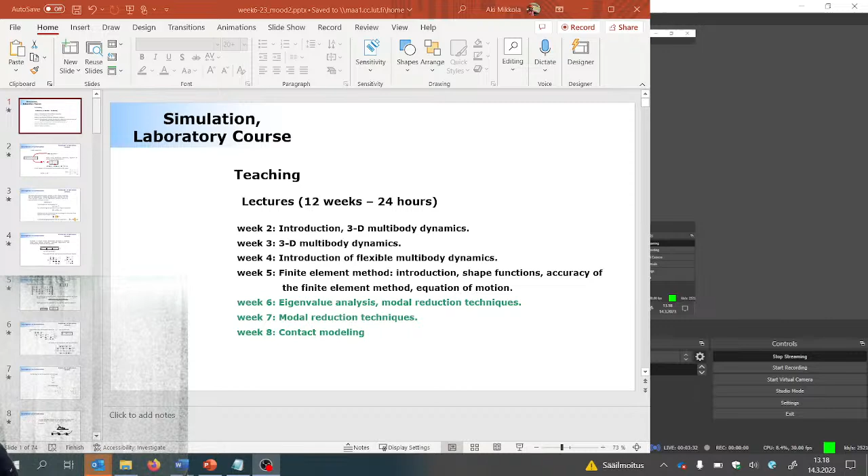Display, so it's a display capture. That's what I would like to use, not this one, but display capture. Okay, so it's active and on.

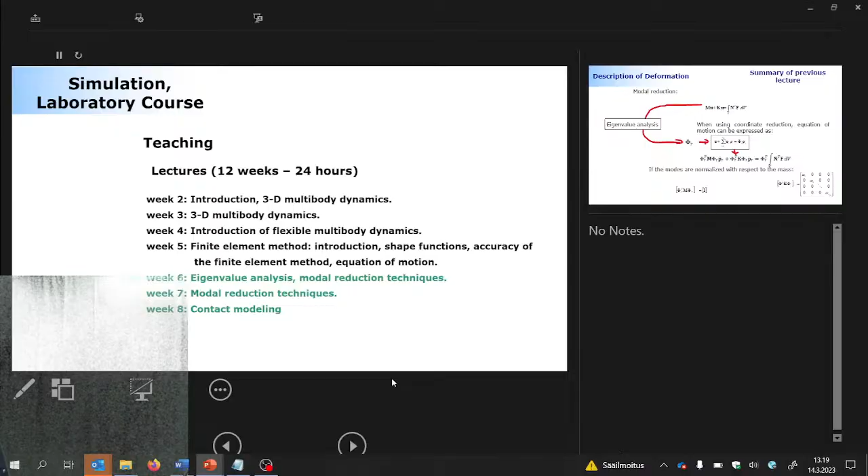Good, but not displayed well to online participants. Okay, so looks good, looks good to me. Yeah, looks good to me.

All right, so what's going to happen today? So we're going to spend these 45 minutes to try to close the case about modal reduction.

And how is my voice, by the way? Is the voice on? It's like 5 seconds of delay, and this is not displaying well, so I need to show this HDMI one.

When do you think it's going to be finished? We're going to close at 2 o'clock. Two, okay.

What about this guy? Why is this not willing to work now? So what should I do here? This is it, this is this, duplicate. Okay, now it's finally good to go.

Cool, and what about this side? Is it okay? Yeah, it looks good to me. Okay, cool. Yeah, it looks okay to me.

That's not the perfect green screen, but it will do the job because we cannot do more tuning here, so it's okay. So maybe, let me see where should I stand. Here.

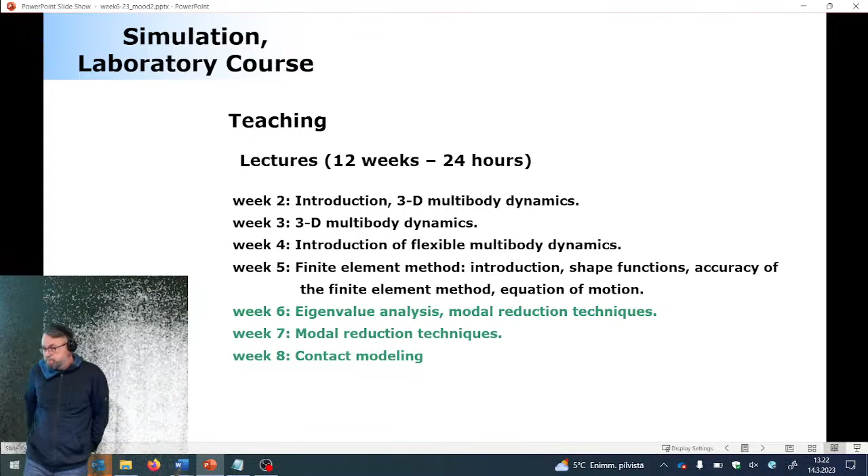This is a very lengthy summary of what we discussed, and I'm going to be very brief here.

So it's all about starting from a full finite element model. And then what we wanted to do with the full finite element model is run the eigenvalue analysis. Based on the eigenvalue analysis, we can get the eigenvalues and corresponding eigenvectors. In theory, if you have a model with 100,000 degrees of freedom, you can get 100,000 eigenvalues, these natural frequencies, and 100,000 corresponding eigenvectors.

That's 100,000 ways that the body can deform, and it's pretty clear that not all 100,000 are significant. Some of them are more significant than others. What happens if we ignore the insignificant ones? Then we can reduce the size of the problem, and that's exactly what we do in a modal reduction technique.

So we conduct the eigenvalue analysis and get an eigenvector, which is a way the structure can deform. How much this particular way will contribute is unknown. That's called the modal coordinate. In our case, the modal coordinate is the one denoted as P here.

Okay, the pen is not willing to work. No, all right, never mind. You see the P here, so that's what it is.

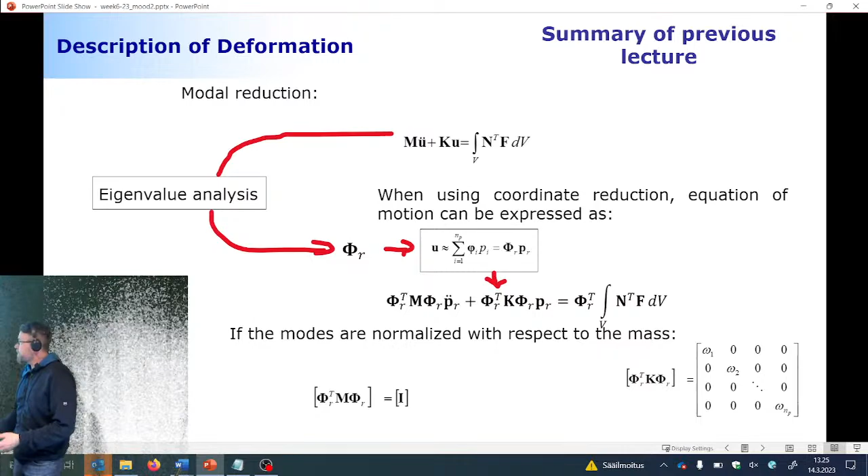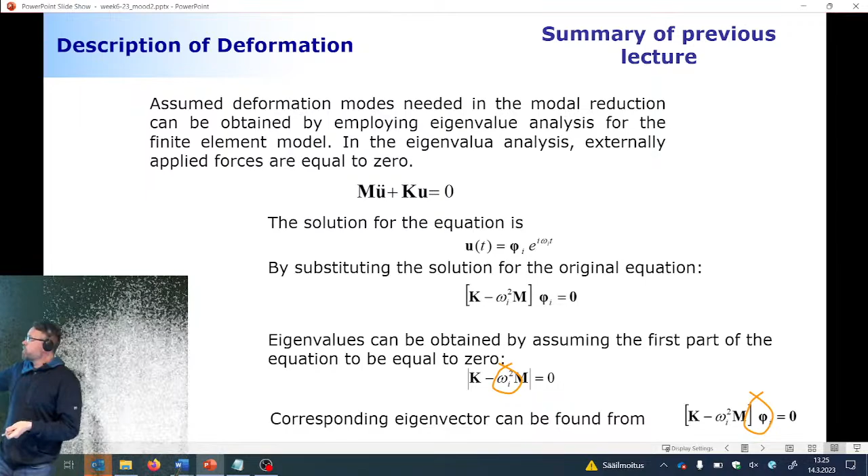So that's what the method is about, and we learned how you do this. In the eigenvalue analysis, it's very important to understand that there's nothing to do with the actual absolute responses, because when we're computing the eigenvalue, we're setting the force equal to 0. When we do that, we can get these eigenvalues and eigenvectors.

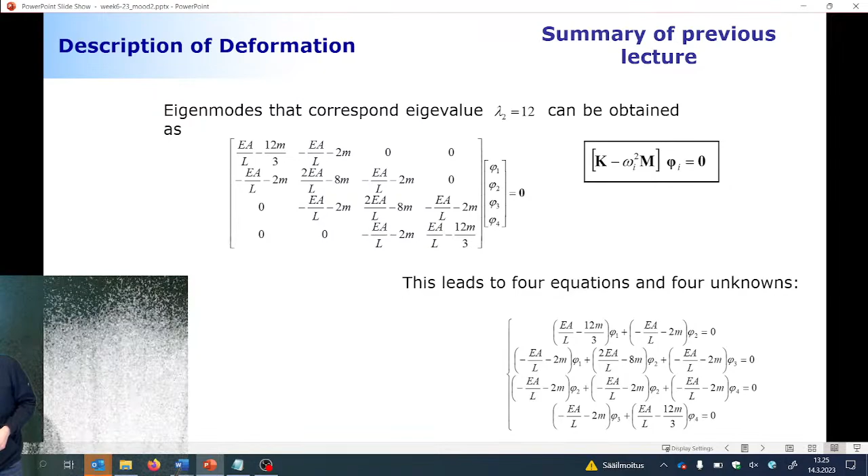An example we looked at was this beam structure, spring structure, and we were able to extract a total of 4 different eigenvalues and corresponding eigenvectors. So that's what we did a little while ago.

Big question is this. What we did in the case of the spring structure was set no boundary condition. The boundary condition in finite element method means the way you constrain your model to ground, the fixed coordinate system. That's typically what that means. Now, the boundary condition we used in the example I just browsed over was no boundary condition. But in real life, what would be the right way to set the boundary condition?

The figure of the real problem you can see in daily life is a crankshaft mechanism. In the crankshaft mechanism, I'm looking at this connection rod. The connection rod is connected by a revolute joint on one end, and another revolute joint on the other end. What is the right way to define this boundary condition?

Here's something very important: the boundary condition that you set in your finite element software will later be called the reference condition in multi-body system dynamics. Why? Because remember the big picture here: we're describing the deformation with respect to a reference coordinate system. What's the reference coordinate system? That's the one that is rotating and translating with the body.

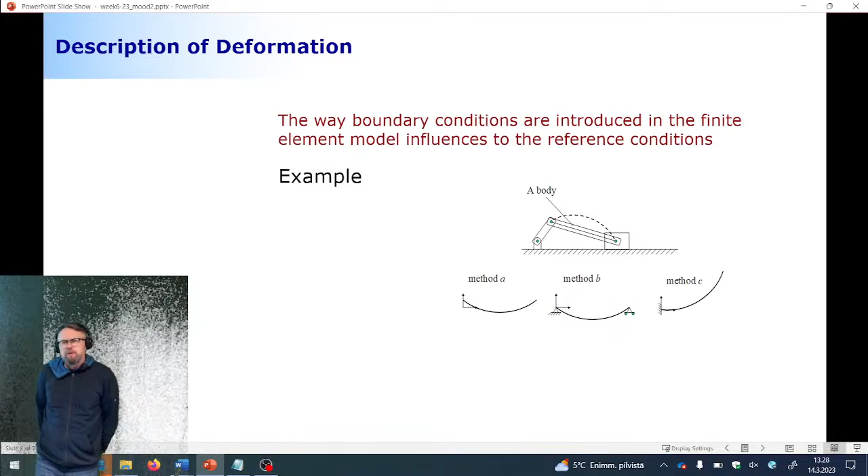But what do you guys think? What would be the right way to do this? What do you guys think is the right way to do this?

Now this is not so serious, we can just communicate it, but I still would like you to use Socrative, because I said that it's easygoing and not serious, but it is, because I'm grading your performance based on this. So what I'm saying and what I'm doing is not the same thing.

So what would be the right way to set the boundary condition, reference condition? The options are method A, where there is no boundary condition whatsoever. Then there is method B, where a simply supported boundary condition is used. Or method C... oh, Socrative is not on. Okay, hold on, just a second.

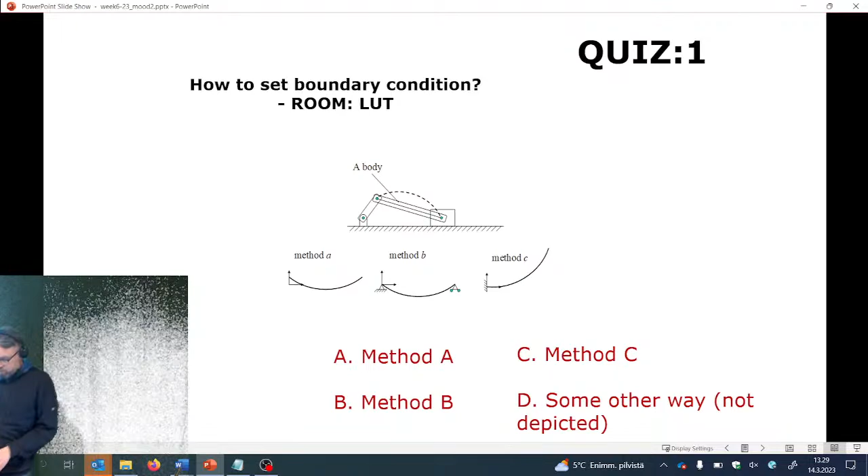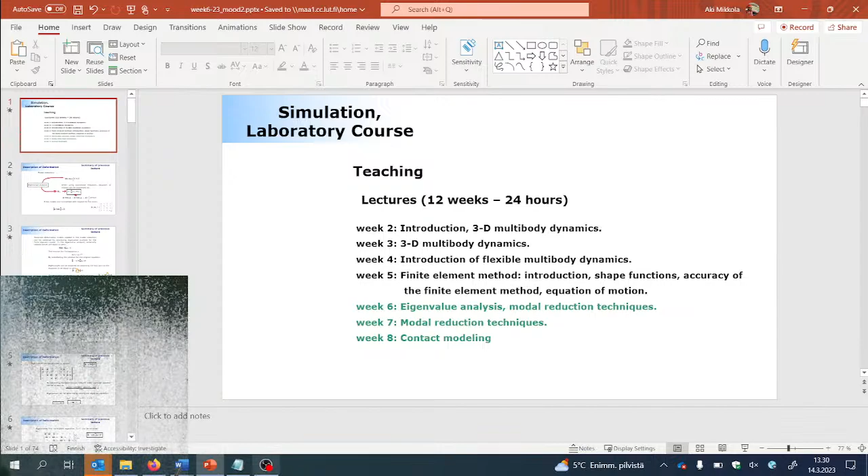How to set the boundary condition? Let me take myself back to this slide where things are explained. Here it is. These are the options: A, B, C, and D. Team Malaysia, how are you casting your vote? How are you entering your answer? What is that, from A, B, C, and D?

B? You both are agreeing with that? All right, then let's take a look at what the others are saying.

One more thing I need to find in my backpack is this one here. Okay, my pen. Yep, I can write because I need to do some writing momentarily. Are we okay? So can I close the in-class quiz? We have 4 students only. I guess that's it today.

Everything is correct. You can do it any way you want. The answer for this question is you can do it however you want.

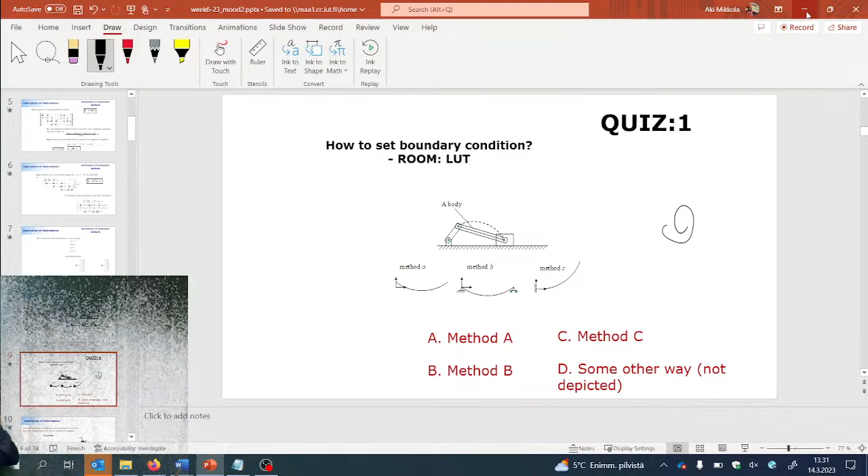This is very, very confusing. Because you know that the boundary condition, how you set this reference coordinate system, will affect the natural frequency. The lowest natural frequency will be different in this case compared to this case, compared to this case. Come on, what is this? So how come you can get the same response?

Here comes something extremely important to understand. What we do in multi-body system dynamics is travel to a final location, which is the position of a particle. Let me highlight this using this drawing. Let's say we have a cantilever beam like this, in its undeformed configuration, and it is loaded by a force at the free end. So what happens is it experiences deformation roughly like this. Sorry my writing isn't very clear, but that's what happens. Now, we are interested in where the end, actually all the particles, are located with respect to the global coordinate system, which is this coordinate system here. Let's see how we can do this.

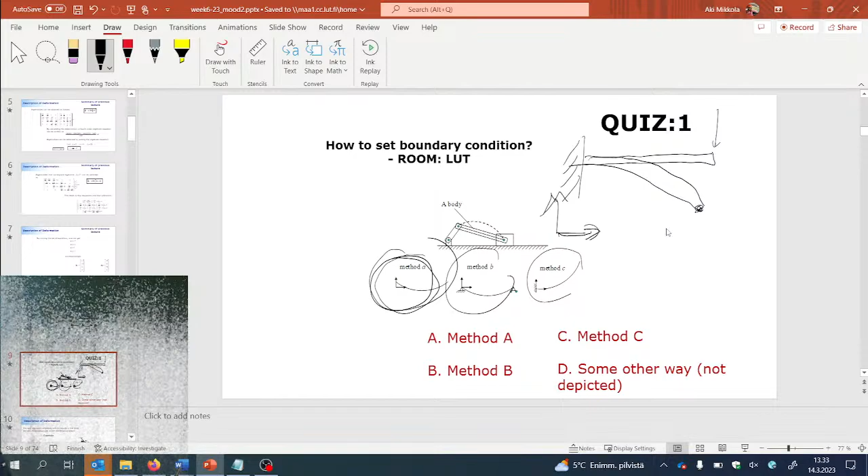If we use boundary condition, reference condition A here, what happens is that the reference coordinate system is no longer attached to a material point, none of them, but it is floating with the body. When the deformation is this banana shape, the coordinate system will be somewhere here. So you move from the global coordinate system to your reference coordinate system with the vector r. Then you take the orientation of the reference coordinate system into account, and with the help of vector u bar, you go here.

Okay, what about the second choice? This becomes a little unclear, but let me change the color to make this clearer. Now if I put my reference coordinate system like this, corresponding to case B here, again I'm traveling first here, and then I'm traveling here. My final destination is the same, so it's no different.

And again, when using this fixed boundary condition for the cantilever beam, I go here. My orientation will be different, but my final destination is always here. So what matters at the end of the day is the shape, not how it's associated with the reference coordinate system. The reference coordinate system is of course very important, but the shape is most important.

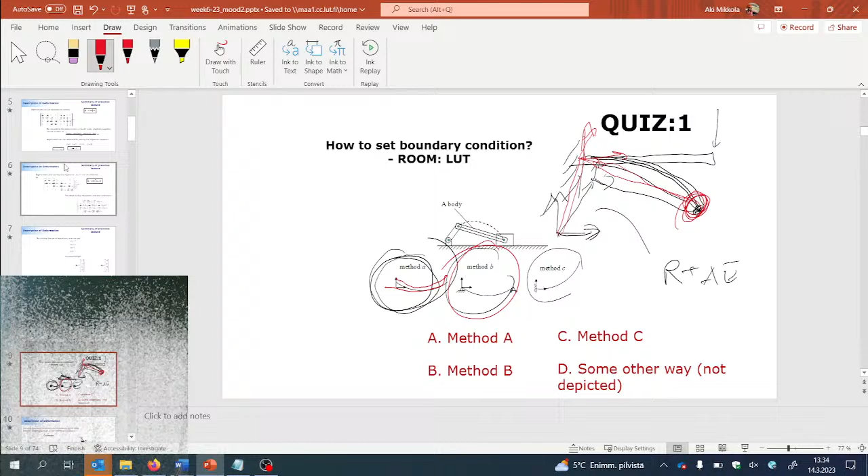If you compare these shapes, they are roughly the same. This banana shape is roughly the same as this one, which is roughly the same as this one. That's why in each of these cases, you can get roughly the same final solution.

Now, this method we're learning here is called the floating frame reference formulation. This means that the reference coordinate system is floating with the body. That's what it means. This situation is exactly the one you can see here. If I put this banana shape and put my reference coordinate system here, you see that the reference coordinate system is detached from the material point. That's where the name floating frame reference formulation is coming from.

So it's not rigidly attached, but it can be floating with the body. It can be traveling, it still can describe the large reference translation and rotation, but it's not attached to a material point. That's something that is pretty amazing. It will be attached to the material point if there's no deformation, but as soon as there is a deformation, it will be detached from it.

Okay, so what do you say? Any comments? Makes sense? Again, floating frame reference formulation, reference coordinate system is floating with the body. No comments, no arguments against. All right, so if not, then we're going to move on.

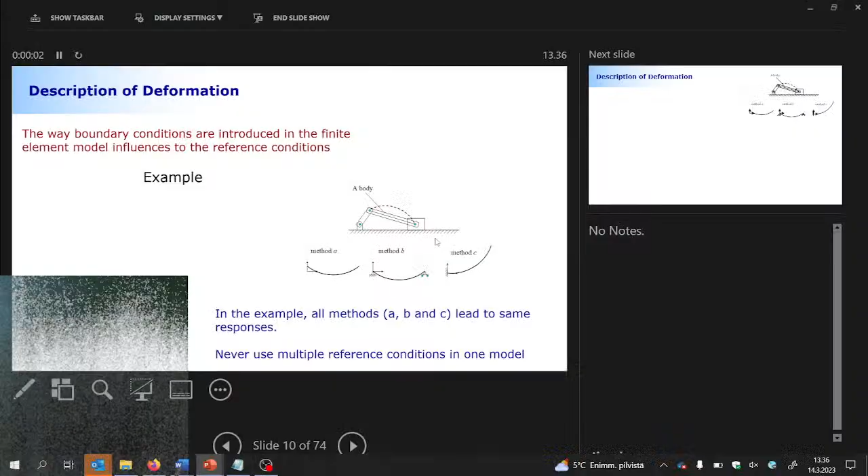Now there is a paper written by Ahmed Shabana where this example is used, this cantilever, this slider-crank mechanism is used as an example. And he demonstrated numerically that you can use each of these three different reference coordinate systems, and regardless of what is your choice, you can get roughly the same response. It's quite surprising, quite surprising.

But again, keep in mind that what we are focusing on is a final destination, where a particle is located. How you're traveling to this location doesn't really matter. Doesn't really matter.

Yes, this one. Okay. Right, like I explained, this was one of the papers written by Ahmed Shabana a long time ago, and he demonstrated that you can do it any way you want. All right, but then it becomes difficult, really.

In practical cases, it may not be this simple. So maybe there are more complicated connections, and it's not as straightforward as the connection rod. The connection rod is somewhat easy to understand, but in real life, there may be harder combinations, so it's going to be something that you need to work harder with. And that's something that we need to take a look at.

We need to actually develop a method that is more general, because this is now based on how well you can set these boundary conditions. Sometimes you can do it correctly, sometimes you may not be able to do it correctly. So we need to find something that is more general than that.

Okay, so this page was made so that I can explain this floating frame reference formulation. By the way, a funny thing about this coordinate system: if you think about it, let's put this as a cantilever beam, and I'm pressing this upwards to make this shape more visible. So if I use this deformation shape here, this is where the point is located. And now the reference coordinate system will be here. You see the reference coordinate system is translating and rotating because of the deformation.

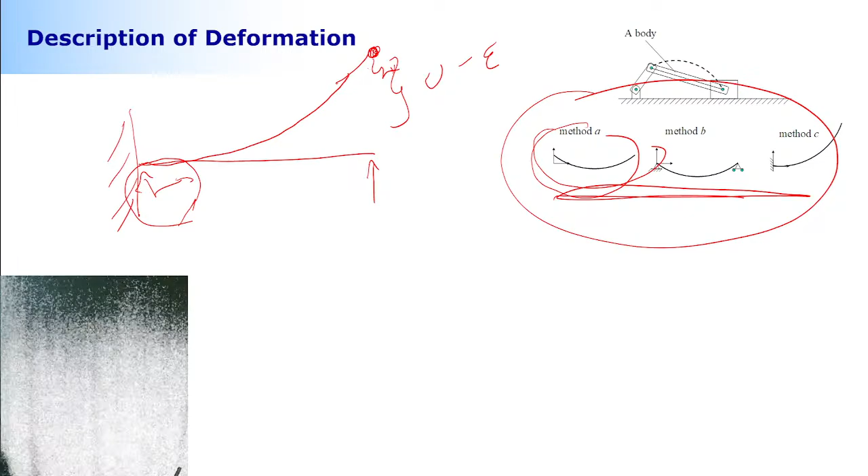So it's not just describing the large translation and rotation, but partly the deformation too. And because of this motion here, it is possible that this setup will introduce a little bit of movement in the axial direction too, even though we still have this assumption of linear strain displacement relationship. Remember, this whole idea about the linear displacement strain relation was the foundation of the modal reduction technique. But still, when we use this assumption, you can get a certain amount of nonlinear deformation simply because of the floating feature of the reference coordinate system.

Okay, makes sense. Kind of makes sense.

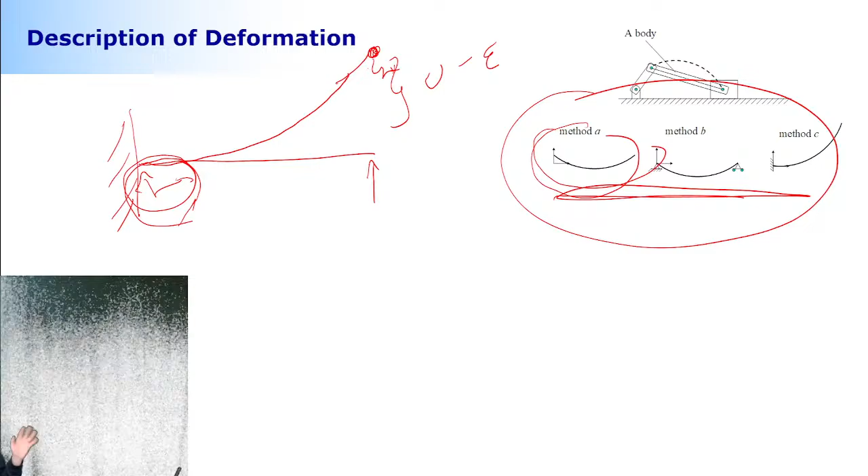All right, what does floating mean in the floating frame reference formulation? It means that the formulation is still under development, so it's floating towards its final form. It means that the body inertia can fluctuate. It means that the strain within the flexible body can be defined easily. It means that the body reference coordinate system can move from a material point of the body. What do you guys say? Okay, let me take myself back.

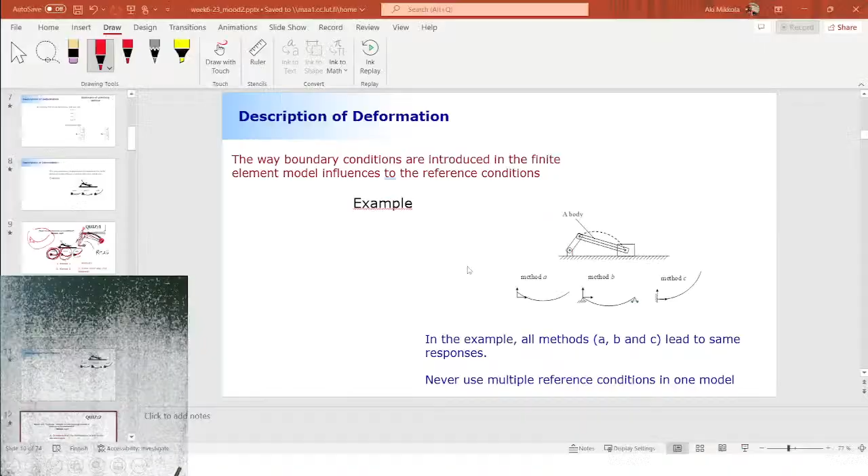Discord. Okay, so there are more answers, but this time, oh, we got nine students still. How come? Okay, you don't see this, so let me make this visible to you. Duplicate. All right. It's a different question. Oh, here it is, this is the right one. What does floating mean in the floating frame reference formulation? This Craig-Bampton was, yeah, my mistake. It seems that I'm doing an awful lot of mistakes today. You agree?

You should agree with me. Definitely, you should. Very good. Okay, so I got 4 answers so far, but there was 9 answers last time. So we'll see then.

Body inertia can fluctuate. It's like body mass can change. It would be easier to say body mass can change.

Okay, so we got 5 votes, 4 votes at the moment, and you guys. Okay, Team Malaysia, what is your vote? How is your vote? Not easy. Your vote goes to what? Are you gonna pass this? You cannot. So what do you think? Oh, can you see this clearly? Okay. And your final vote is what?

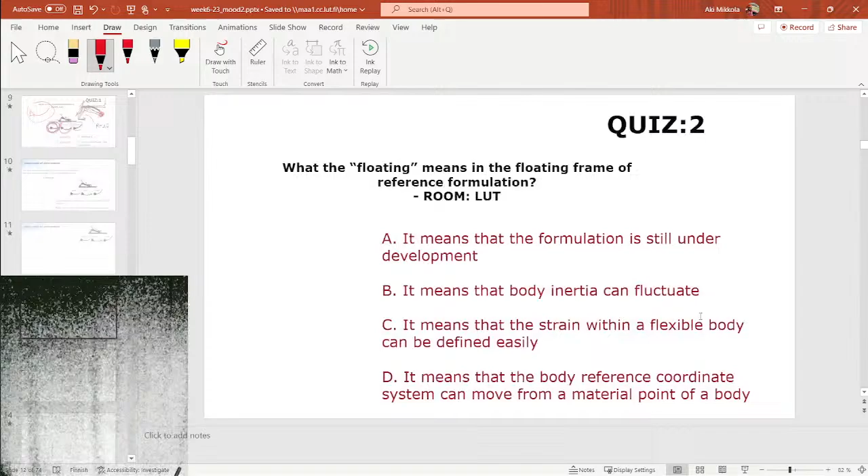Okay, so the final story that I would like to tell today is, like I said, in general cases it becomes difficult to set this boundary condition. It's not easy, and it's doable in simple cases like a connection rod, but in general cases it becomes complicated. That's why many commercial software packages use something called Craig-Bampton modes.

You saw already that one of my in-class quizzes was related to Craig-Bampton modes. But what is the deal with this Craig-Bampton mode? Is this something you have heard about earlier, because I think Jussi Sopanen was explaining about this? No, he's not explaining about the Craig-Bampton modes.

Okay, this is one way that we can get this deformation mode. And this is so popular because it offers something that is very general. You don't need to have deep knowledge about finite element modeling to be able to use Craig-Bampton modes. How it works is fairly straightforward.

You take your finite element model and then you select the points of interest, something that you feel is important for you. And something is important maybe because there is a joint connection from that particular location to neighboring bodies, or there may be a force imposed at this particular position. And the force could be due to hydraulics, or a point force that you know for sure will be applied to this particular location of the structure.

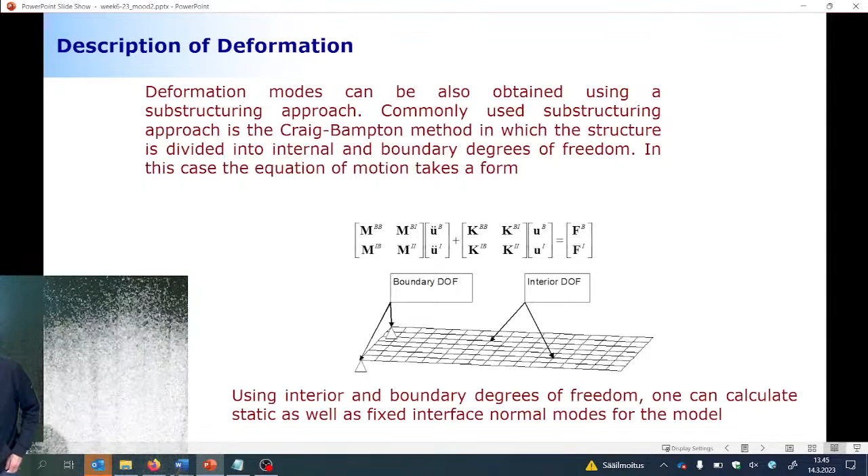Now I have here an example structure, which is a plate structure. And I'm saying that the point of interest need to be in this case, this corner... you see that on the left side of the plate there are 2 corners, and each side of the plate, they are selected as a point of interest.

Now the point of interest needs to be named better. And the way we're going to name this is as boundary degrees of freedom, because they are where the structure is connected to its neighboring bodies, forces, or joints. So 2 nodal locations are selected as boundary degrees of freedom.

Now all these nodes and corresponding degrees of freedom will be selected as one category of degrees of freedom. The rest, which will be much more than the boundary degrees of freedom, will be selected as interior degrees of freedom, so there's going to be a lot of them. If you think about this structure, the majority of degrees of freedom are internal degrees of freedom.

6, because this is a plate element. The plate element usually has 6 degrees of freedom per node, not per location. 6 plus 6 is considered to be boundary degrees of freedom, a total of 12. The rest, 100 or something, will be considered as internal degrees of freedom.

Now what we're going to do is make a revisit to our equation of motion, which we use in finite element modeling to describe the performance of this plate structure. This equation of motion consists of mass multiplied by nodal acceleration, stiffness multiplied by displacement, and external applied forces. Now we're going to reorganize rows and columns of these two matrices such that the boundary degrees of freedom will be positioned at the upper left corner of the mass and stiffness matrices.

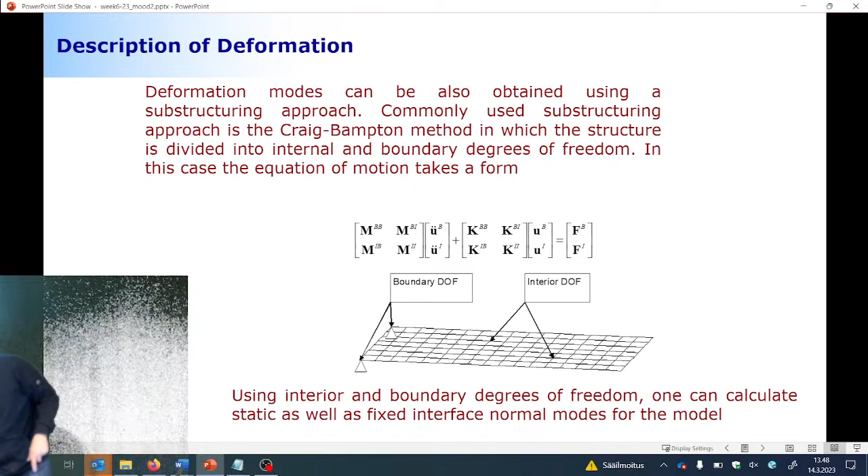All right, now this is how we organize things, and then we're going to do the computing. The way we're going to do the computing is that we're going to take a close look at interior degrees of freedom, meaning the lower right part of the mass matrix and the lower right part of the stiffness matrix, which is big in size. We're going to use them to compute eigenvalue analysis. Then we're going to compute something called static correction modes, based on these boundary degrees of freedom. So first step, we're going to take these interior degrees of freedom.

You see that the lower right part of the stiffness and mass are used, nothing else, absolutely nothing else, no forces, nothing. And then we're going to compute eigenvalues and corresponding eigenvectors.

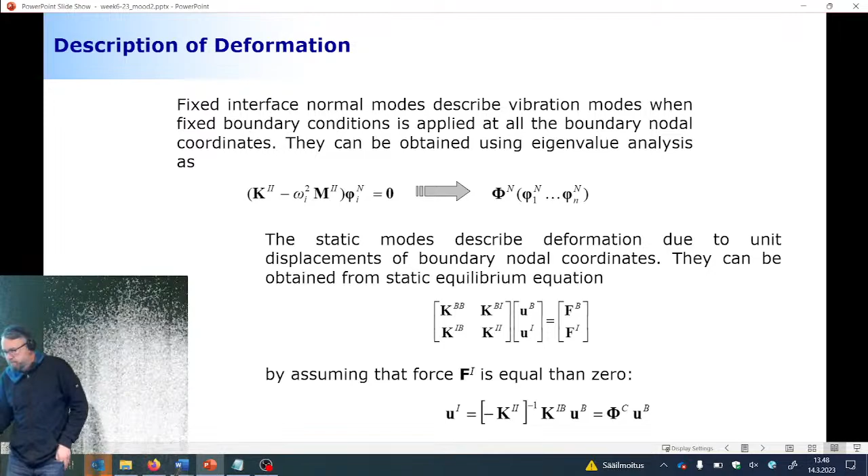Then the next step is that we're going to forget about the inertia term as completely as we can, and we can only look at the statics, which is a stiffness matrix multiplied by displacement, equal to external applied forces. And that equation we use to solve interior degrees of freedom. Oh, let me try to do this.

So we're computing this guy. And when we're going to solve this from the upper equation, it's going to be like this. So it's going to be the part of the stiffness related to interior degrees of freedom, and then some cross terms as well. You can get another set of modes.

What do these modes physically stand for? Let me give you an example. If you have a beam structure like this, consisting of this many nodes, I'm going to select this one and this one to be my points of interest. These are where I know it's going to be connected to neighboring bodies, or where there's going to be a lot of force in both of these locations.

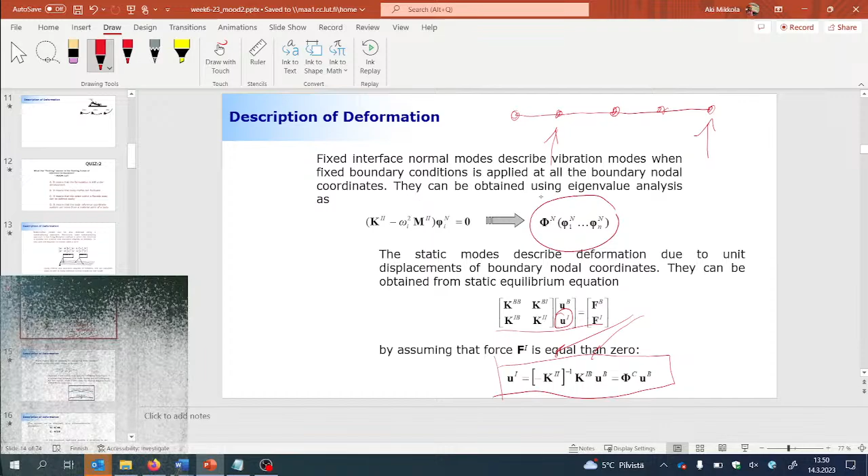So what happens then is that I'm going to first compute this set of modes, which is physically the same as attaching these degrees of freedom to ground like this. You conduct the eigenvalue analysis for the rest of the degrees of freedom, meaning the lowest mode you can get will be something like this, or maybe pointing upwards, something like that, and then higher and higher frequencies. That's going to be the first set of modes associated with this computation.

Second set of modes will be something where you introduce unit displacements to each of these boundary degrees of freedom. Let me take this drawing away a little bit. So if this was my structure, and that was selected, my boundary degrees of freedom mass was this one. So what you're going to do is attach each of these nodes to ground one at a time, and then introduce a unit displacement. This is one unit displacement, and you're going to see how the rest of the degrees of freedom follow that displacement. That's going to be associated with this set of modes.

And then what you're going to do is combine these modes. This is a good picture - a beam structure where the node on the left side, the node in the middle, and the node on the right-hand side are considered points of interest, boundary degrees of freedom. We're going to first conduct the eigenvalue analysis, and then we're going to introduce the static displacement, so there will be an equal number of static displacements as boundary degrees of freedom. Now you can get two different sets of modes, which are combined using this matrix definition here.

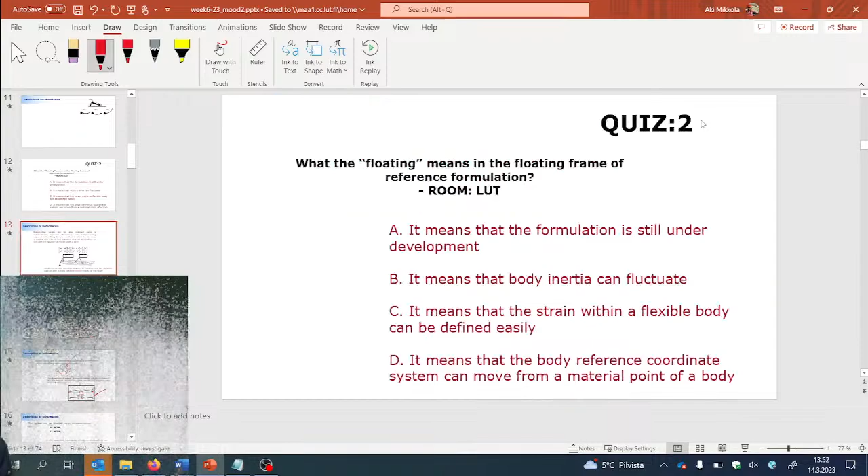Now we cannot get this same solution because these modes we're going to get from this Craig-Bampton method are not orthogonal, because of the static correction mode. Static correction mode is not independent, but it's a combination of previously known modes. So it's not able to give you this diagonal representation.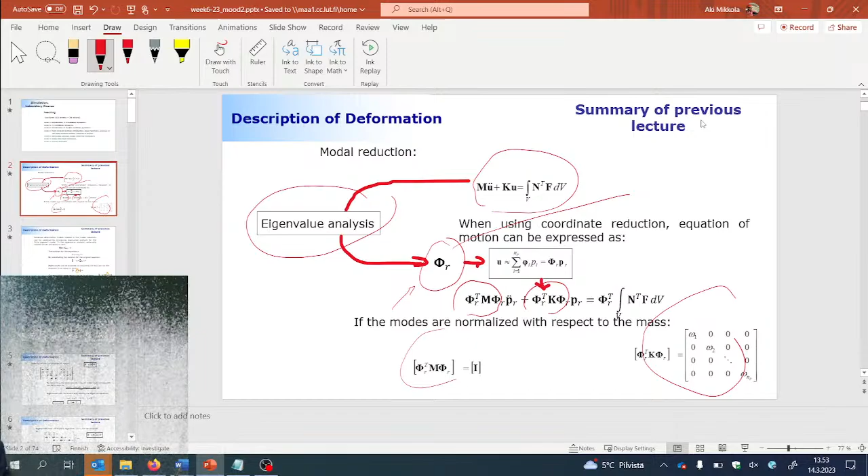I feel it's not a major problem, but some people say this is such a big problem, we need to fix it. And you can fix it if you want. The way you can fix it is called, it's a very complicated name, orthonormalization. How it goes is this.

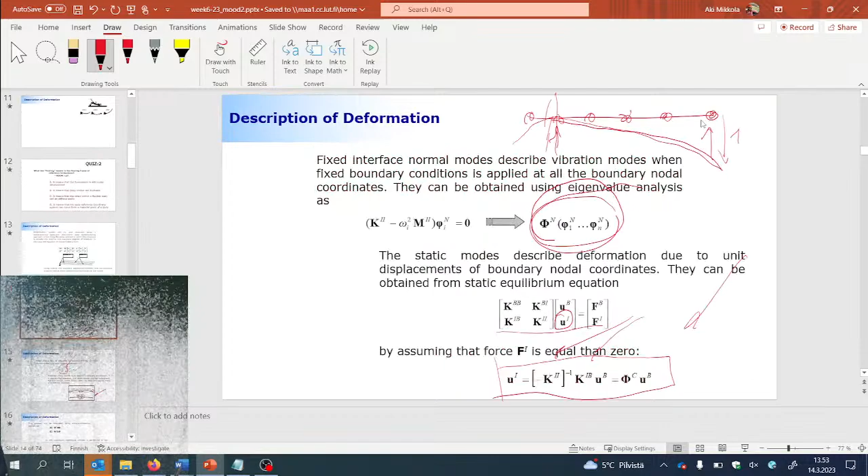So this is what you're going to get, this set of modes which is not orthogonal, simply because this is based on unit displacement and they are not vibration modes. And if it's not a vibration mode, it's not orthogonal. So you're going to get this set of modes.

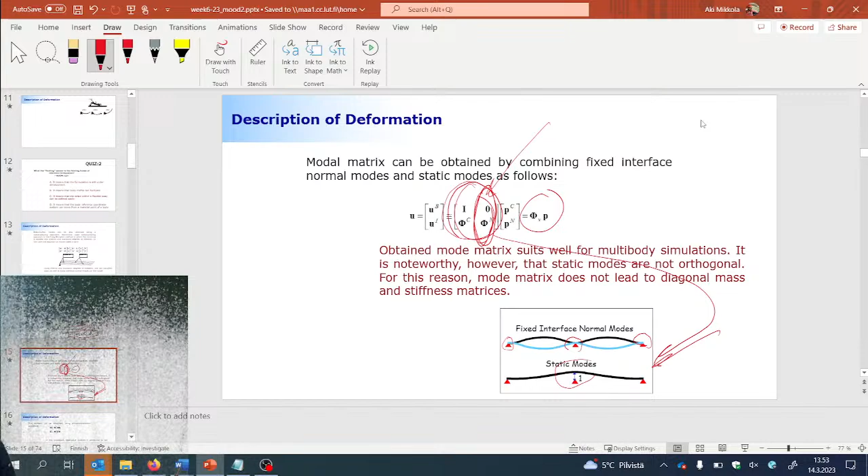And what you're going to do then is that once you compute your stiffness and mass based on this set of modes, they are not orthogonal. This will include terms that are non-diagonal, off-diagonal terms will be non-zero. And you can get rid of that by simply taking this new stiffness and mass and introducing another set of eigenvalue analysis, which is called orthonormalization.

You put them in one same package. You're forcing things to be orthogonal. And when you do that, you will get the new set of modes. Based on this new set of modes, you will get absolutely diagonal stiffness and absolutely diagonal mass.

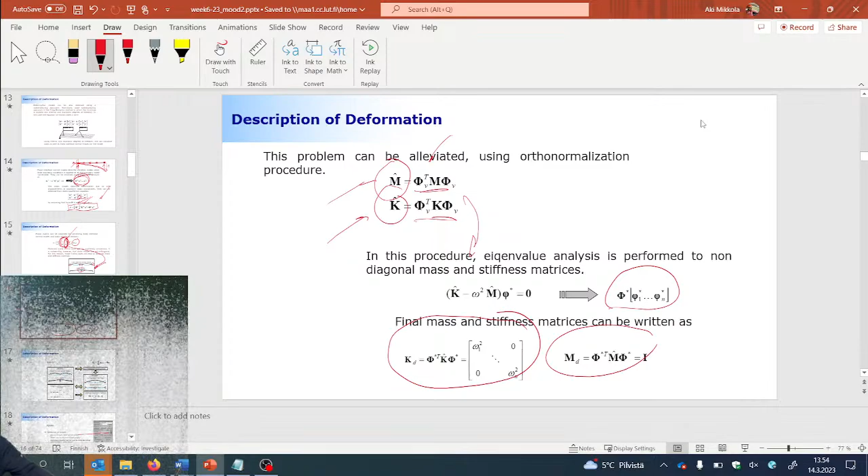What is going to happen in this phase, when you're introducing eigenvalue analysis again, is that you can lose the physical interpretation of the modes. You can get something that is roughly, approximately free modes, and something that is approximately local deformation due to the forces.

Roughly free modes is this. Boundary modes where there's heavy local deformation will be the ones that are very good to capture the force deformation, or the deformation due to the forces, in the beginning. Those will be this other set of modes. And that's how it works. So that's the Craig-Bampton method.

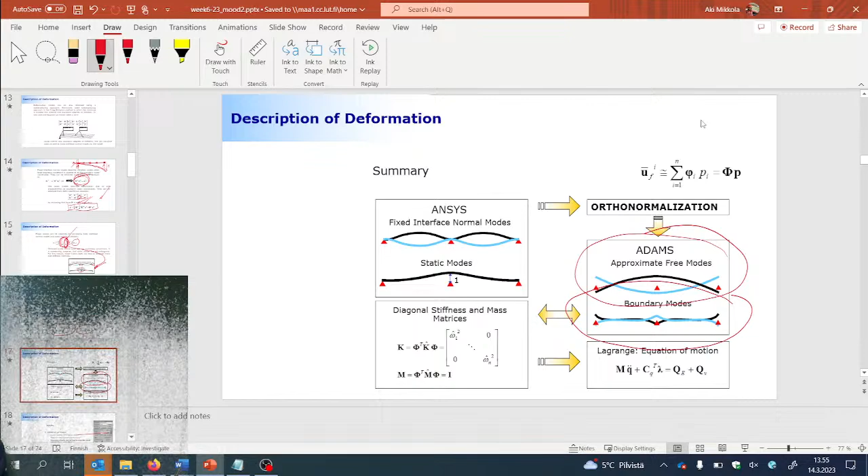How do you guys like the Craig-Bampton method? How can you then, in real life, select these modes?

Well, the strongest tool for selecting the modes is your engineering brain, sometimes called engineering sense. It's not the same as common sense. Common sense and engineering sense are related, they're cousins, but they're not the same thing. Engineering sense is more powerful than common sense, because, I don't know why, but it seems to be like that, because engineers are well educated. Common sense is for common people. Engineers are better than common people, right?

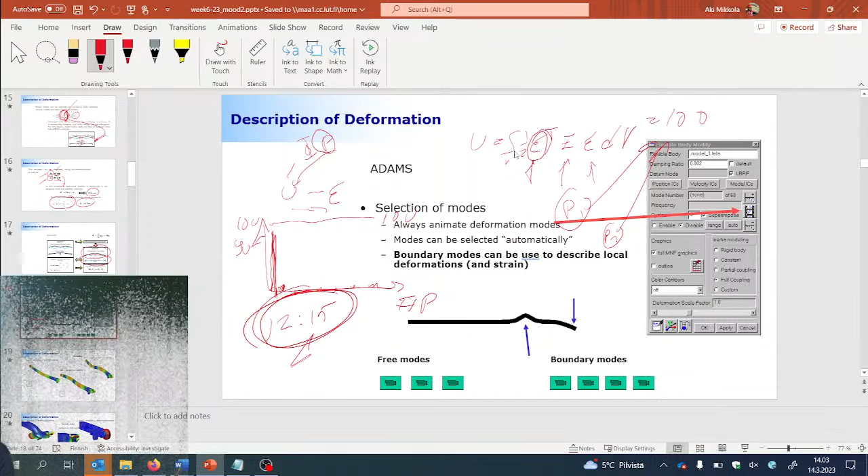Honestly, I don't know what the heck happened. Maybe, but this isn't my worst mistake, because once I invited a big group of students to come over from another university and completely forgot. I got a phone call saying, where are you, the team is here. And I wasn't even in the university. I said, oh, it's going to take a couple more minutes, I'm walking from my office. So it can happen, it can happen. My apologies.